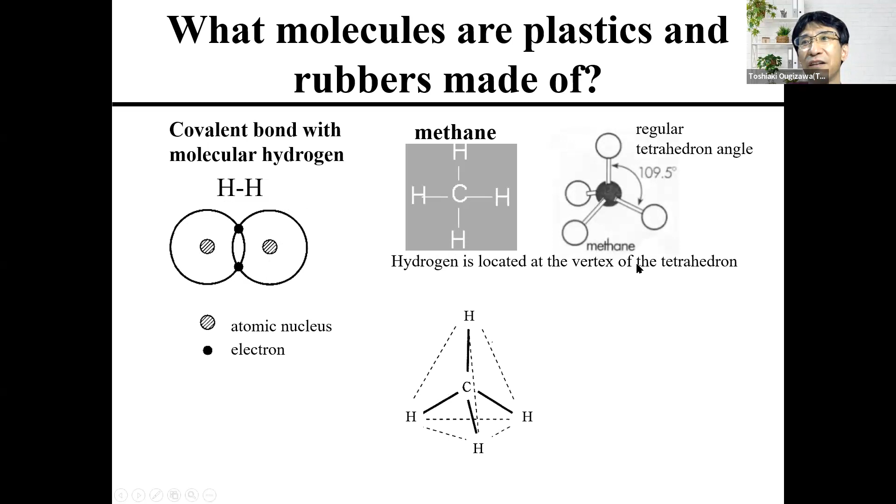Methane is CH4, so hydrogen is located at the vertex of the tetrahedron. This angle is a regular tetrahedron angle, almost constant, from 108 to 110, almost fixed. That's the structure of methane.

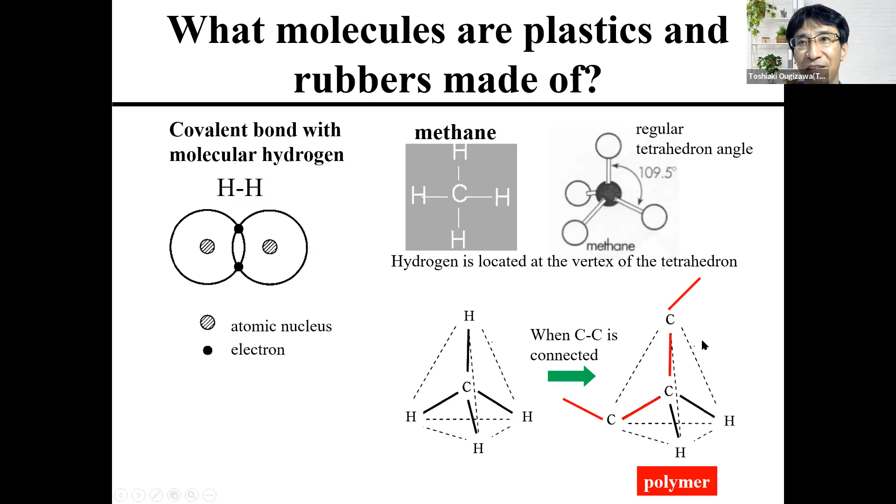So this is the 3D structure as well, with hydrogen located at the vertex of the tetrahedron. So we change two H to carbon, and maybe carbon backbones connect together. In this case, this becomes polymers. That's a very simple structure.

So what is plastics? As a general term, this is like the package food container in convenience stores. That's very popular for use.

Anyway, as a general term, high molecular weight materials exhibit plasticity under heat or pressure and can be processed and molded into the desired shape. In most cases it's referred to as thermoplastic resin, but sometimes we call it thermoplastic polymers.

A polymer with a glass transition temperature Tg or crystal melting point Tm above room temperature has almost no fluidity at room temperature. So at room temperature, it's almost solid - usually solid becomes that material.

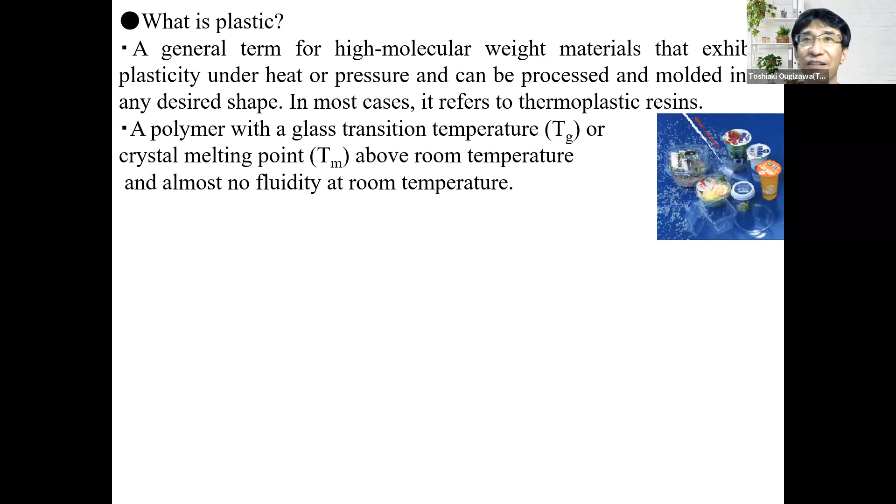So what is rubber? For example, tires come from rubber. Rubber is a general term for a substance that deforms greatly when force is applied, but returns to its original shape as soon as the force is removed.

Chain-like polymers with chemical and physical cross-linking have Tg below room temperature. So in brief, both are chain polymers that solidify at temperatures above or below room temperature. Rubber is usually soft, so its glass transition temperature is very low, but plastic is almost solid, so its glass transition temperature is very high.

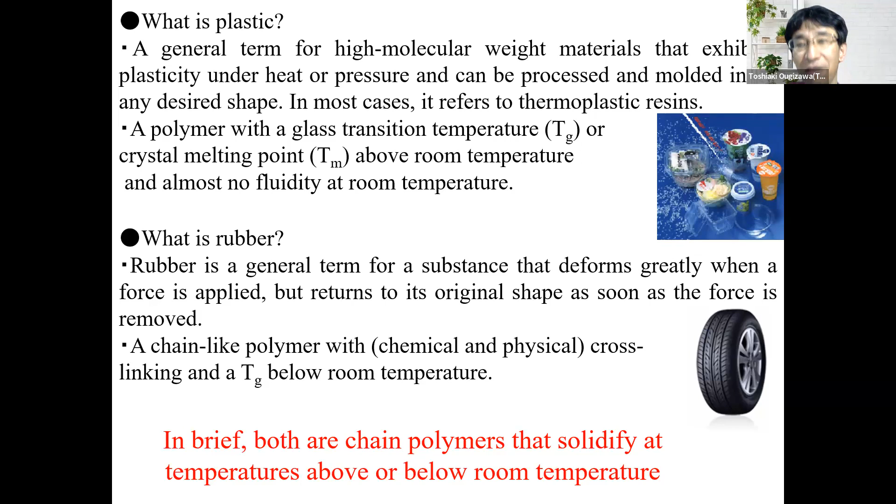So well, usually plastic is the material, and also rubber is a material. This is the temperature dependence of the elastic modulus of plastics and rubbers.

This is typical plastic, polystyrene, usually used for food containers. The glass transition temperature is 100 degrees here. Less than Tg, almost at room temperature, it's in a glassy state - this is almost solid.

Also polyethylene, sometimes used for convenience store bags. Its glass transition temperature is very low, but at room temperature it's in a crystalline state, so it's almost solid when we use these materials at room temperature.

But the other one is rubber. A typical rubber is polybutadiene. Its glass transition temperature is almost minus 100 degrees Celsius, but at room temperature the elastic modulus is very, very low, less than 1 megapascal. Usually plastic is more than 1 gigapascal, so there's a 3 or 4 order of magnitude difference - very large.

But at room temperature, the rubbery state has cross-linking or something, so its fluidity is not so large - it almost doesn't flow. So rubber becomes the material that makes tires. But at higher temperatures, maybe it rubbery flows, and after that viscous flow occurs.

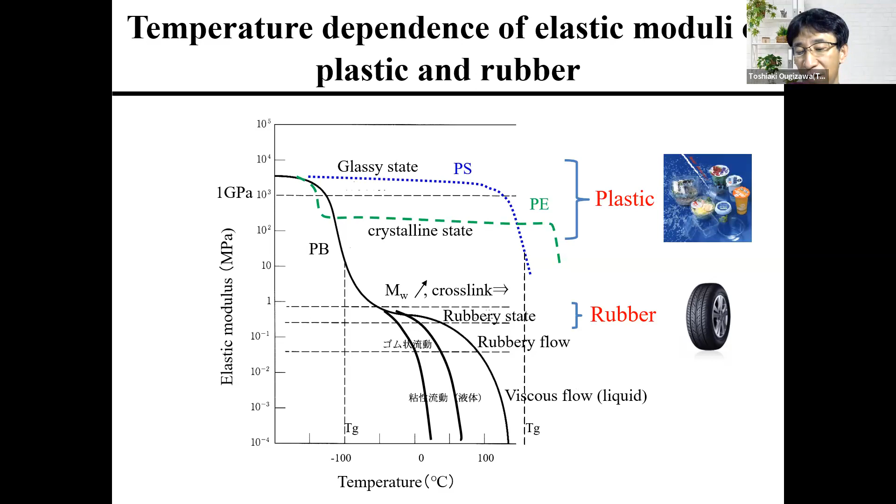So what are organic materials? Organic molecules are molecules with a carbon atom backbone. But only carbon, for example graphene or carbon nanotube, these are not organic molecules. Organic molecules have other atoms, for example hydrogen, oxygen, nitrogen. In that case, we call that organic molecules.

So some materials such as plastics and also rubber, fiber, papers, gel, biopolymers, and also liquid crystal, organic conductive materials, some things - almost all these materials are polymers. Because polymers at room temperature are almost always solid, so we use these materials, okay?

But liquid crystal at room temperature, maybe lower molecular weight liquid crystal is not a polymer, but almost like a liquid, okay?

So covalent bond makes diverse molecules. We connect carbon, hydrogen, oxygen, nitrogen and other atoms. We make many kinds of polymers, okay? So that diverse molecules is...

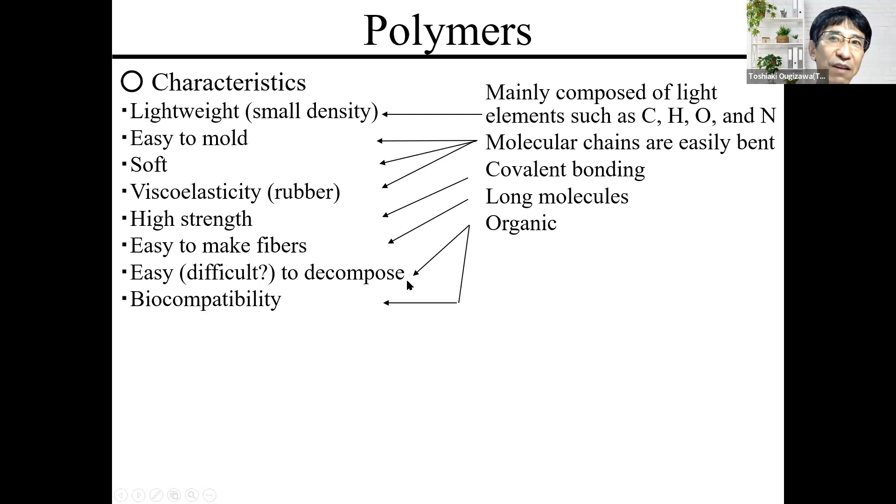And also easy to make fibers, because polymer is a long molecule. And also easy to decompose, and also biocompatibility - because these are organic materials, okay?

Lastly, I said covalent bond is very important in these materials. So we make diverse molecules, that means diverse states also.

In polymers, at amorphous phase, it's almost like this one - we call that the random coil, this amorphous state. But in crystal state, molecule arrangement is like this one. So covalent bond is very, very strong, but that one is easy to rotate. But these directions are very, very strong.

But between the molecules, there's only weak interactions, very, very weak. So in these directions it's very strong material, but in these directions, very, very weak material. So this one is the average of this, okay? Anyway, we use the covalent bond to make very, very strong materials.

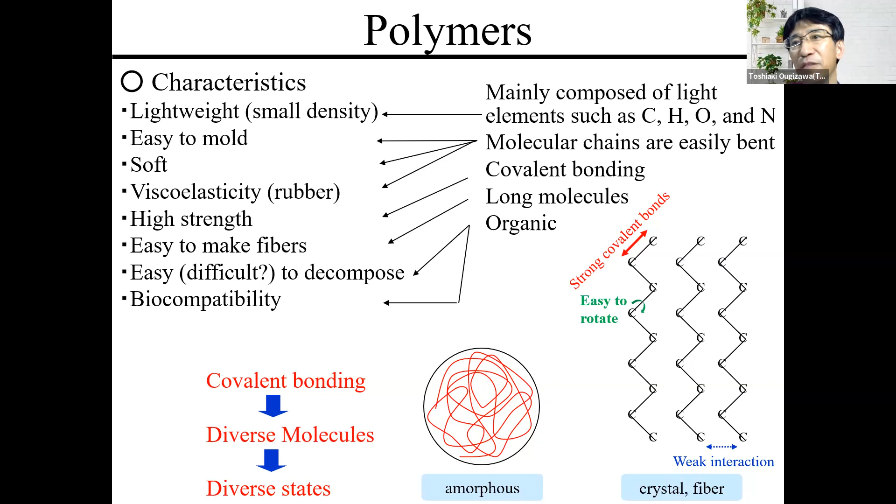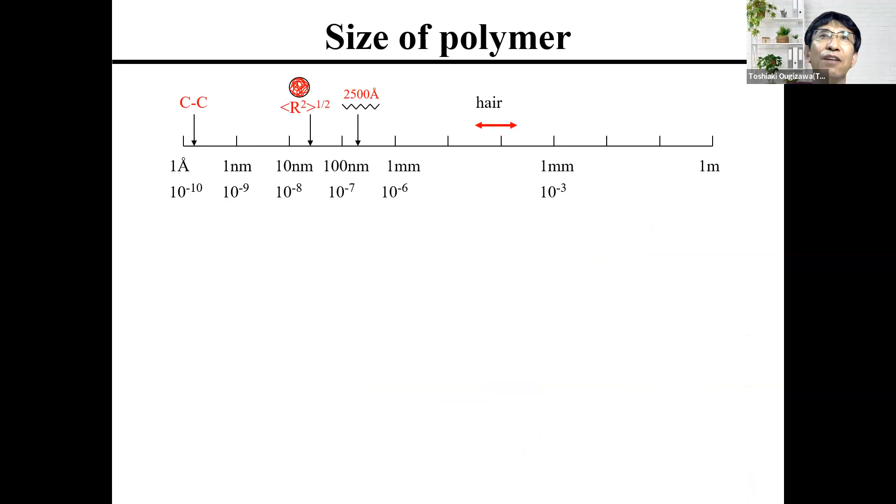And also this is the size of polymers. So this is 1 meter, 1 millimeter, sorry this is 1 micrometer. And here is 100 nanometers, 10 nanometers, 1 nanometer, 1 angstrom. Our hair is almost 100 micrometers, okay, and the C-C bond is almost 1.5 angstrom, this one, very, very short.

So maybe this is a monomer. Monomer connected to 1,000 - so 100 times 1,000 means that's 10^5, that is the molecular weight. So degree of polymerization means the number of monomers, in this case 1,000, this one.

The length of these molecules - so maybe here, C-C bond is 1.54 angstrom. So the total length is 3,080 angstroms, this one.

But carbon has only 4 arms, so the tetrahedral angle is almost 110 degrees. We fix that angle. In this case, the longest structure is like this one - we call that a flat zigzag extended chain. So in this case, this distance is only 2,500 angstroms.

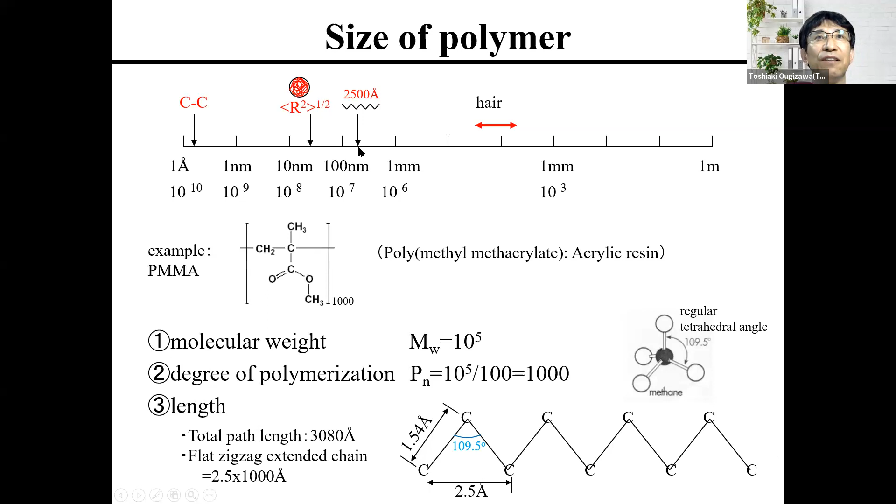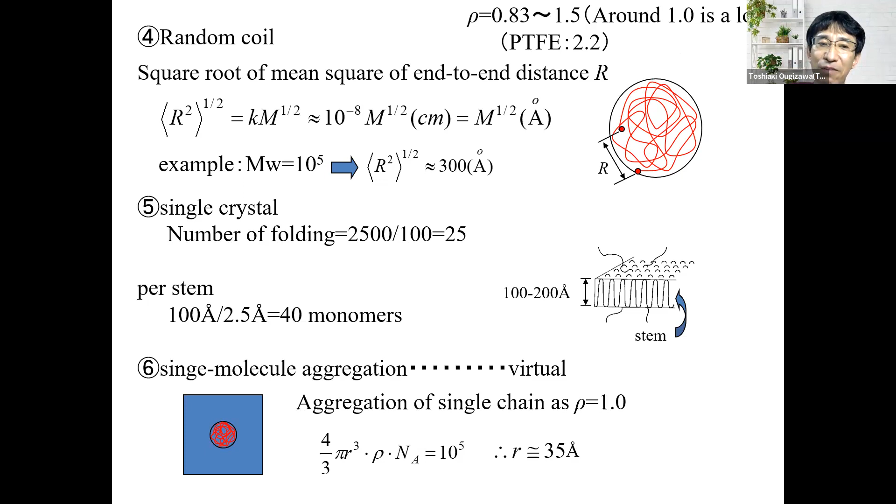Remember that the size of this is very important. Also densities: polymer density is almost around 1.0. Polyethylene, the convenience store bag material, is almost 0.85 or 0.9, very lightweight. But PTFE, polytetrafluoroethylene - the Teflon - has a very high density of 2.2. But almost all polymers are around 1.0. For example, polystyrene is 1.04, so almost the same as water. You should remember these things too.

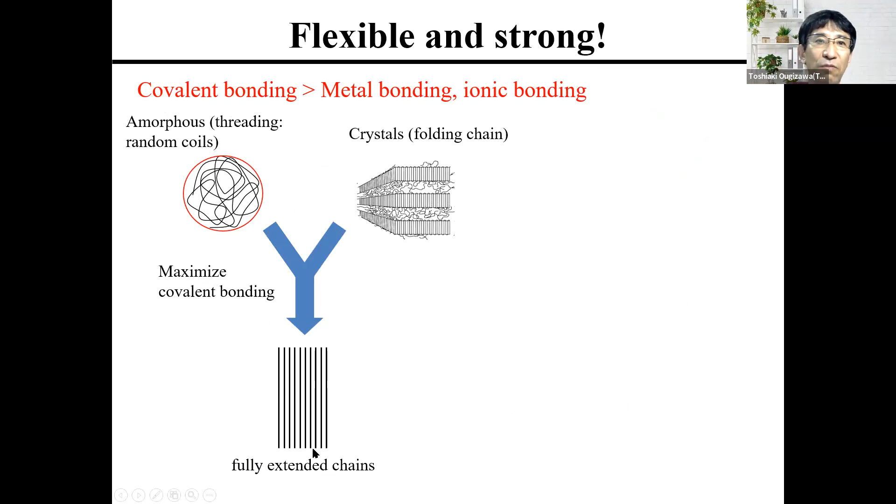Polymeric materials are sometimes flexible and sometimes strong. Usually covalent bonding is very strong, stronger than metal bonding and ionic bonding. There are amorphous structures and crystal structures, which maximize covalent bonding - like fully extended chains. Fully extended chains are very, very strong. We make these from polyethylene or aramid fibers. Maybe somebody here knows Kevlar - this is a very rigid chain.

This material is sometimes used for bulletproof vests like this. It's very, very strong as a fiber, and that fiber is almost entirely made of fully extended chains.

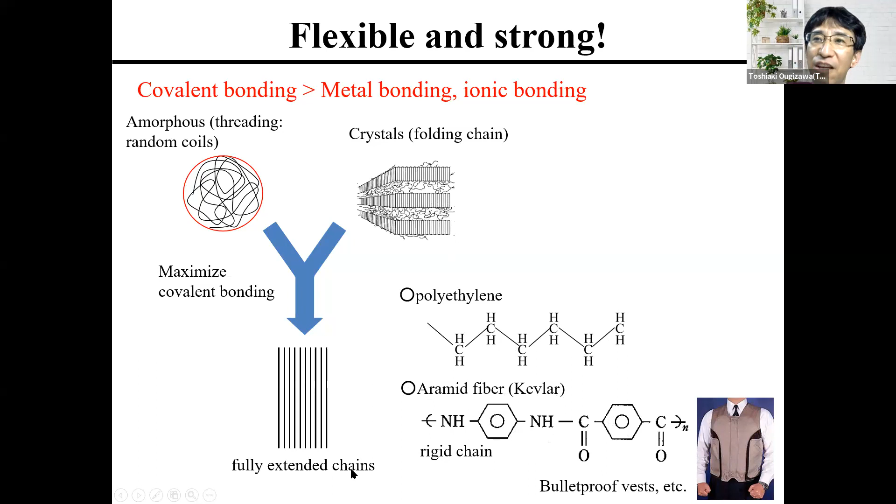Next, there are thermoplastic and thermosetting polymers. Usually we use thermoplastic polymers, like when making chocolate. Let's make some plastic polymers: first, melt chocolate in hot water, pour the melted chocolate into a mold, cool and harden it, and we get the material - completed when removed from the mold.

For thermoplastic polymers, the same thing occurs. Chocolate is almost a plastic material. The mold with poured chocolate corresponds to a metal mold - the mold with poured polymer corresponds to the metal mold. The tool used to pour, instead of chocolate, plastic, is the molding machine. Plastic products of various shapes can be made from various materials.

But another polymer exists: the thermosetting polymer, a little different from thermoplastic polymer. Thermosetting polymer corresponds to cookies. When we make cookies, we mix flour, butter, and other ingredients, shape the material, and heat it in the oven. The finished cookies, we eat.

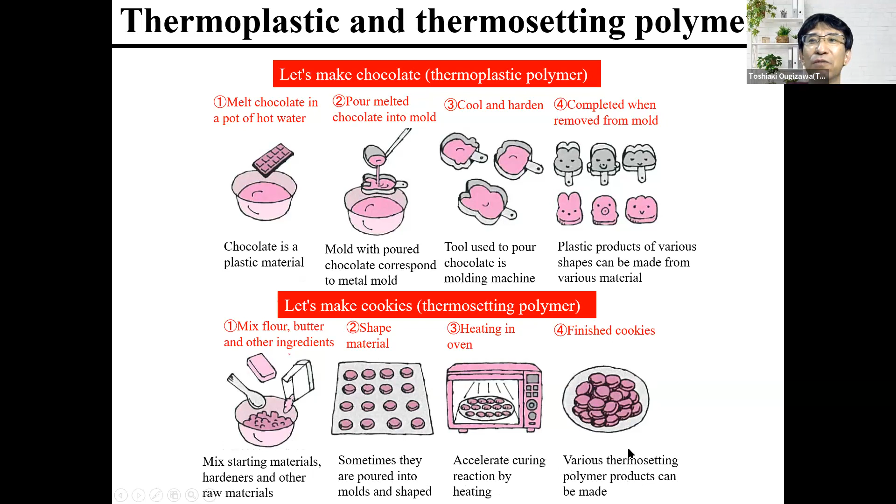The processing route is like this: for thermoplastic polymers, usually we first use polymer pellets. Polymer pellets are maybe 2 or 3 millimeters in size - everybody probably knows this.

By heating, the polymer melts. After that, we inject it into the mold, then remove the polymer from the mold to get the material. After that, it can be remelted, so in that case it's renewable.

These polymers include polymethyl methacrylate (acrylic resin), polyethylene, polystyrene, polycarbonate, and polypropylene. Polycarbonate is used for window materials, carport roofs, or similar things. Polypropylene is used for car bumper materials. And polyester - polyethylene terephthalate - is used for PET bottles and similar products. Also polylactic acid and nylon, etc.

For thermosetting polymers, the processing route starts with raw materials that are almost liquid, then injection into the mold, similar to before. In thermoplastic polymers, the melt is very viscous, but in thermosetting polymers, it's a very low viscosity liquid. Both are injected into the mold, but in the thermosetting case, heating causes the material to become almost solid. We then get the material, but it cannot be remelted or renewed.

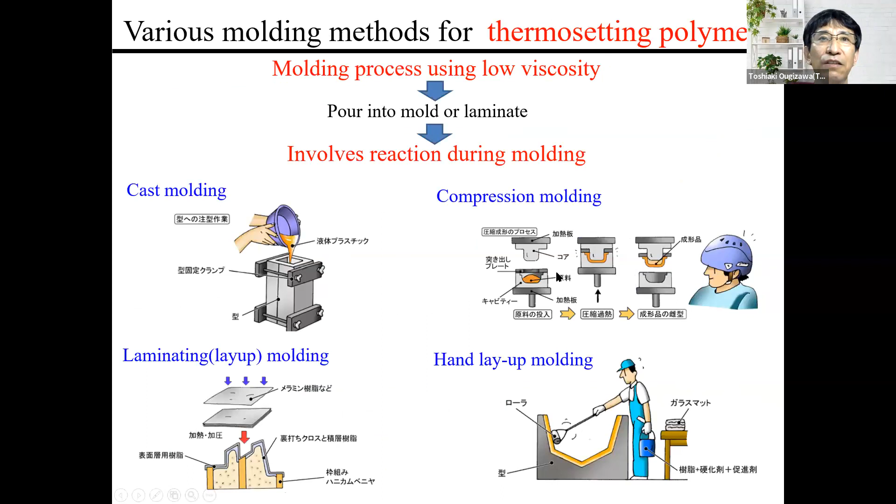Anyway, every student makes a soft robot, and in that case they use silicone rubber as well. For that, we use cast molding.

When I explained plastics, automobile parts are very popular for industry. Automobile plastic parts include front bumpers, instrument panels, rear box decks, luggage trim, and rear bumpers - many kinds of parts are made from plastics. The biggest one is the front bumper, like this one.

So what functions are required for bumpers? Can we use rubbers, or what kind of structure do we have to make? What function is required - impact strength is a very important thing. It has to protect our body. The car or bumper may break, but the human doesn't break - so the car bumper is a very important part.

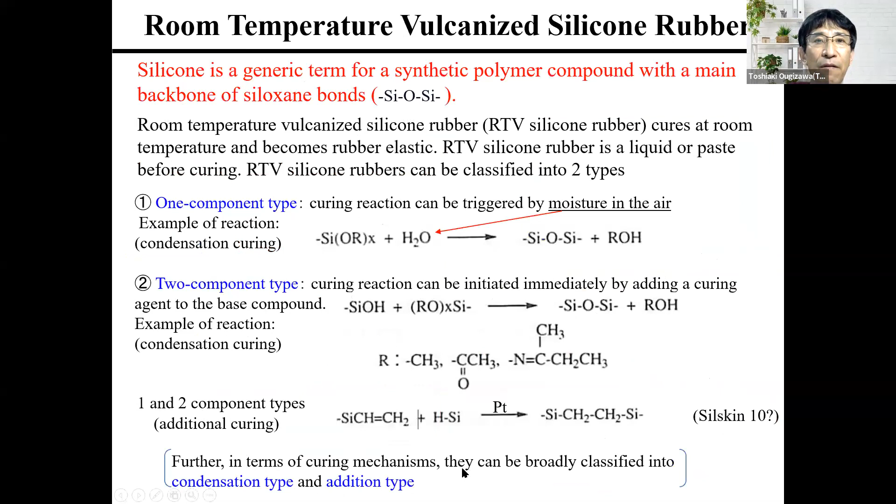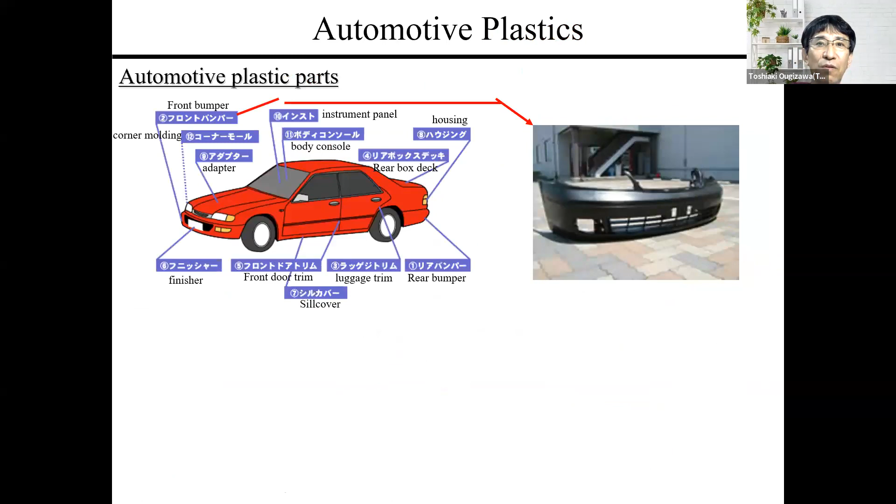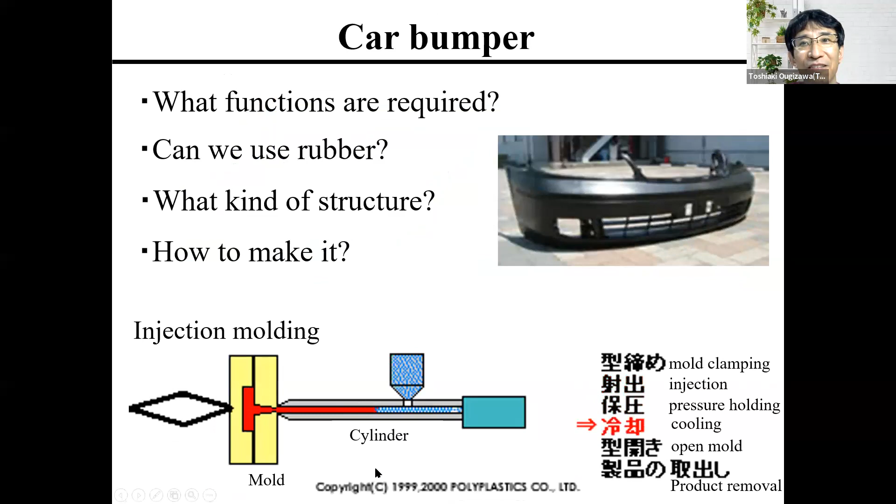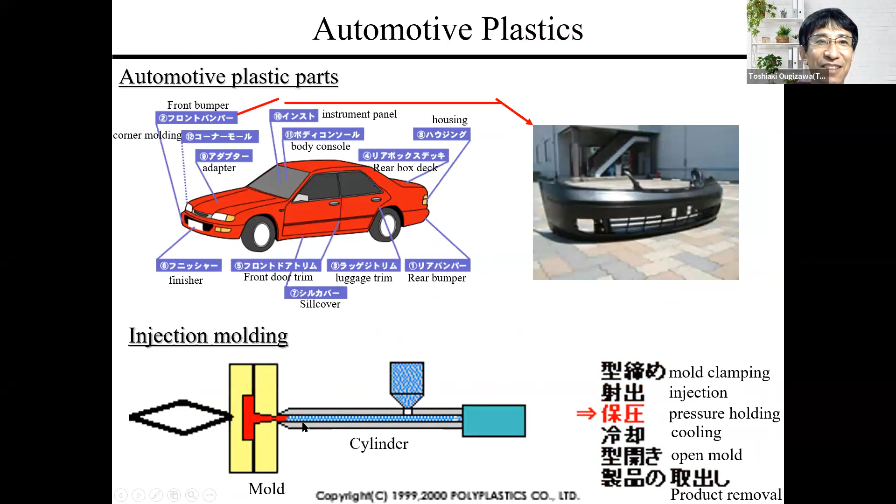So we make car bumpers by injection molding. Anyway, we use injection molding for making bumpers.

Next, the tensile properties - ductility and brittleness. Everybody knows tensile testing, so that's why we get the stress-strain curve like this.

Here, this breaks at very low strain - this point is the elongation at break. When elongation at break is very small, we call that brittle. Some polymers that are very brittle include polystyrene, acrylic resin, cast iron, and concrete.

Another type is ductile materials. In ductile materials, plastic deformation occurs, like this. We call this portion the necking - here's the neck. After that it breaks. In that case, elongation at break is larger.

But still the modulus is high. In that category are materials like polycarbonate, stainless steel, and dural. Another one is rubber - rubber's modulus is very low, but elongation at break is very large. So usually these three main types of materials exist.

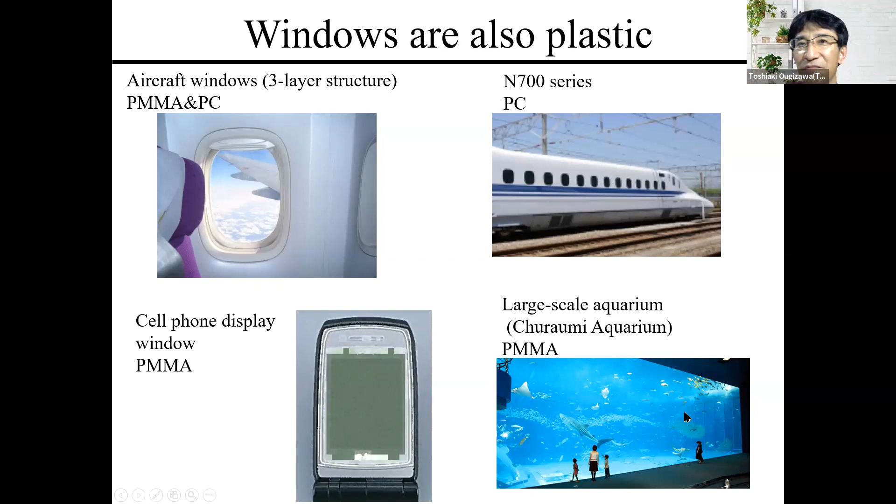And also some cell phone display windows are PMMA. For iPhone or something it's glass, inorganic glass. And also Churaumi aquarium, this is a large scale aquarium. This is good looking - these windows are PMMA or polycarbonate, not inorganic glass. Inorganic glass is sometimes very dangerous; if it breaks, small pieces are scattered. That's very dangerous.

Maybe fighting plane windows are just plastics. That's very interesting.

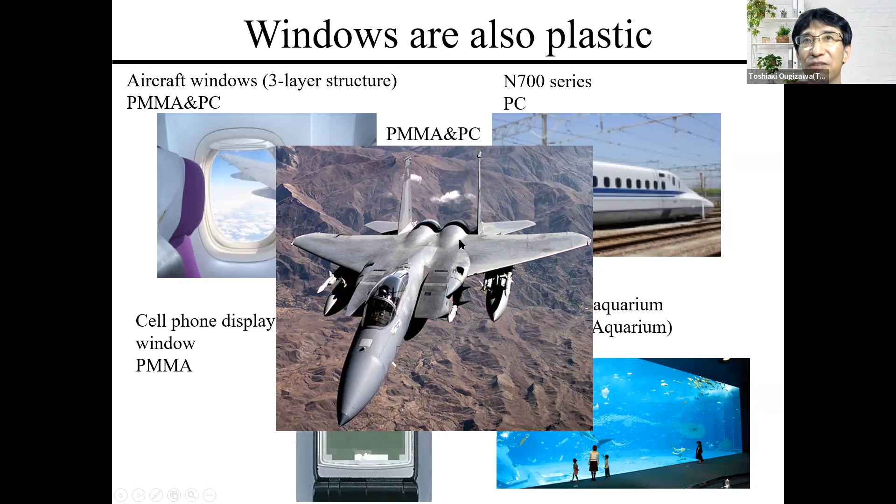This one is the Churaumi aquarium large tank. This is PMMA. Thickness is 60 centimeters, height is 8.2 meters, width is 22.5 meters. Almost one big plate. This window, a small Japanese company makes it - Nippura, the company name is Nippura. This is maybe shared number one in all over the world for aquarium windows.

My daughter took these pictures. And also this one is Aquamarine Fukushima's large water tank. I took this picture. Also a big one, this one. Here is a human, for scale. After that, we go to the backyard of this aquarium.

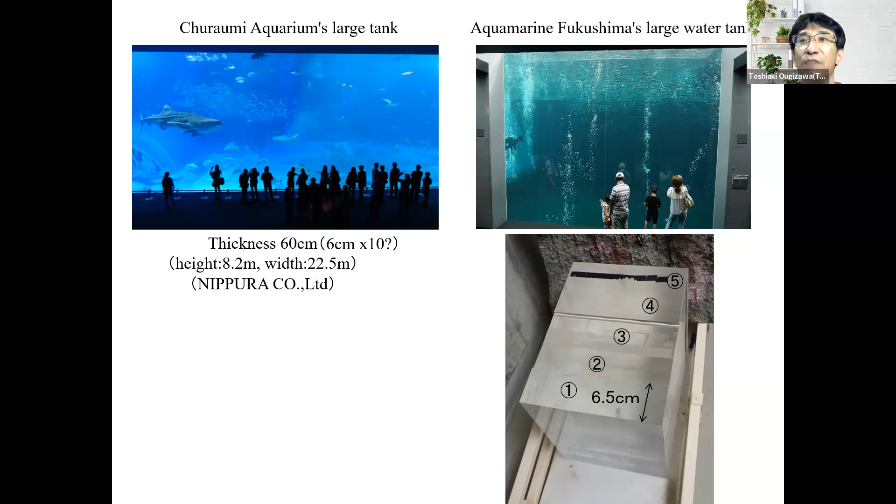In this case, some window material is there. Maybe this is 6.5 centimeter plates of PMMA - 1, 2, 3, 4, 5. So the total thickness is 32.5 centimeters. This is PMMA, so we adhere plate 1 and 2 and 3 and 4 and 5 with PMMA monomers. PMMA monomer is MMA. After that, MMA becomes polymer, that means it acts as adhesive. After that, this plate becomes only one piece. That's very interesting.

And the next is polyethylene. I said it's a convenience store bag. This is the most simple structure of polymers, just CH2 and CH2. So this is the chemical structure, but it's a long chain. This is a little three-dimensional figure. So the C-C bond can rotate easily, which means it's very, very flexible chains.

So amorphous structure is like this one. This is random coil, this one. But these materials make crystals. Crystal size like this one.

Maybe platelet, this one, so we call that lamellas. So lamella is a plate-like crystal, this one. So this one, many of these lamellas like this one.

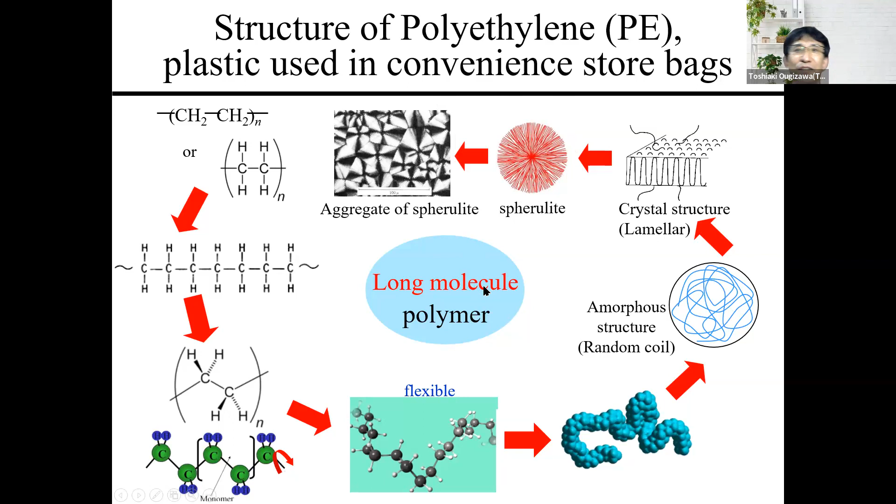So this is spherulite, so this is crystal, this one. So this is an aggregate of spherulites. So this is, yes, convenience store bags morphologies, this one. Okay, so anyway, that's long molecule polymer, this one.

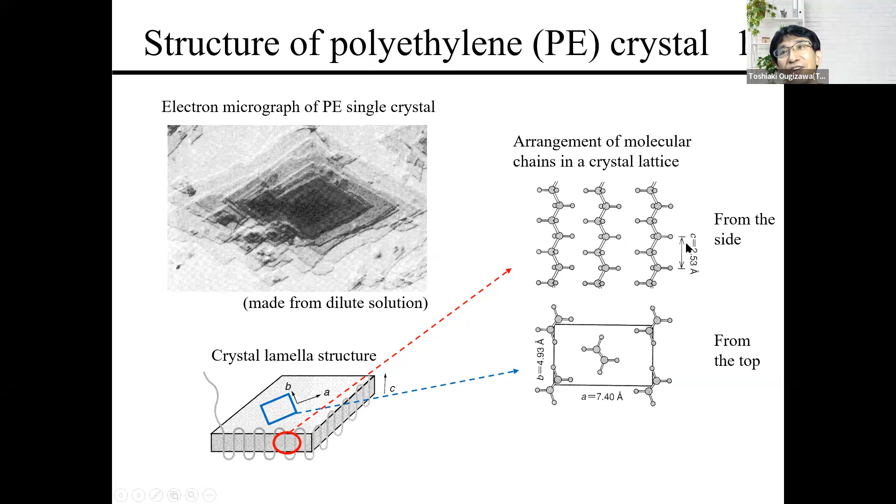So this one is a polyethylene crystal. So this is a single crystal, made from dilute solutions. So the structure is this one. So in crystal, polymer chains arrange regularly, this one. So that's crystal, this one, okay?

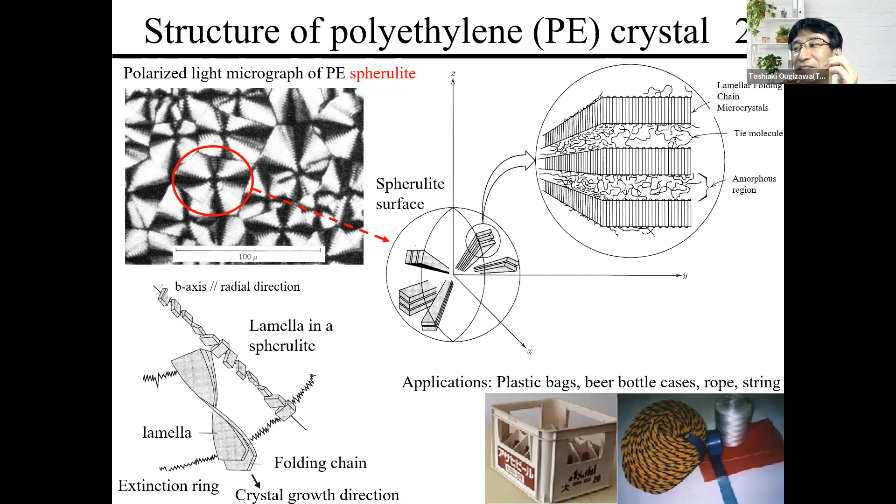Professor, hi, I actually have one question. Yes. So I'm not in the material field, I'm a theoretical researcher working on mathematics. Every time, I'm an optimization researcher. So yeah, not mechanical engineering or something, no? Yes, like optimal design of mechanical components, something like that. So I'm not really familiar with material science.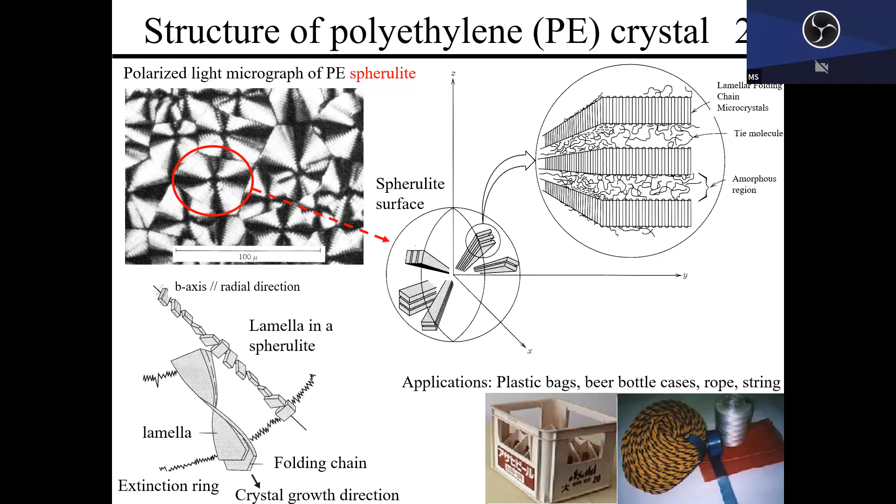So whenever I see a paper with a slide or a figure like this, every time I see researchers try to draw, how do I say, particles or molecules, I don't know, I'm not sure what's the right word, the shape of the polymers, like the crystal one. Yeah, so you draw something, people draw something describing how they're properly aligned in a directional way. How do you guys know they really look like this? Is it based on imagination or?

No, not imagination as well. We measure this one. For example, yeah, we use X-ray or transmission electron microscope. Yes, so we check these morphologies. I see, actually this morphology exists. I see, so I believe material science researchers have done a lot of testing, measurements, observation by really precise equipment. Yes, but because they're so small.

Yeah, so small. So sometimes I have this question: how did you, what is the trick to realize that in fact the material looks like this? That's only out of my curiosity, because I have no experience. Maybe you can share something about how researchers define the shape of those geometries.